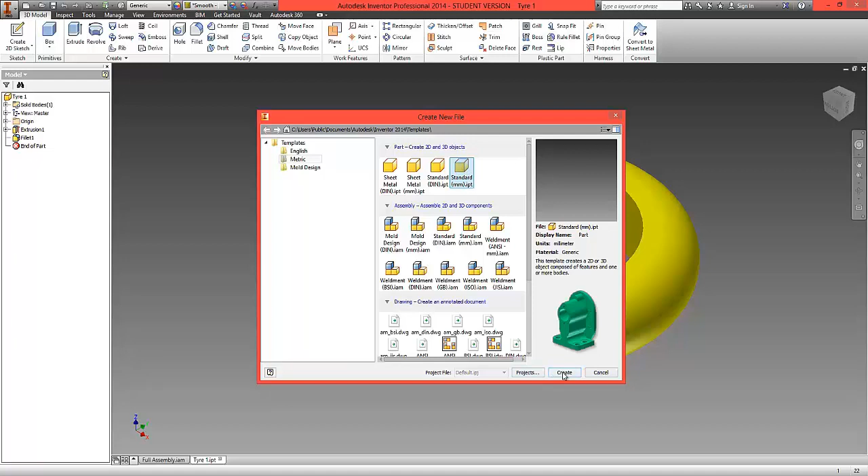First of all, in the top left corner of Inventor, choose the application button, choose New, and under the Metric tab select Standard Millimetre IPT part and select Create. We are now modelling a new part.

From the top ribbon we're going to choose Create 2D Sketch, which has a shortcut of the letter S from the keyboard, and in the appearing datum planes we're going to choose the XZ datum plane. Select it and we move into a very quick 2D view. From the top ribbon we now have a range of 2D drawing tools.

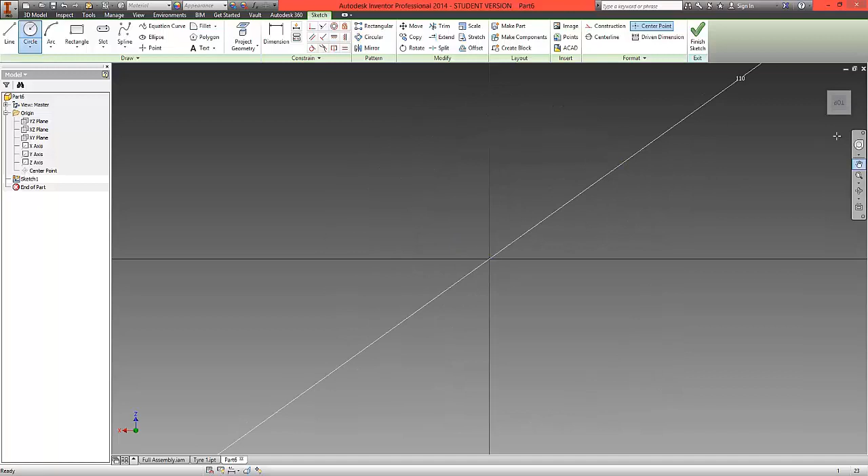We're going to select the circle tool and we're going to snap to the central dot. This will appear as a green dot. We're going to click out and enter a value of 110mm and hit enter on the keyboard. When we resize with the navigation box in the top right, we can now see we have the outside circle of the wheel.

We're going to use the same circle tool again, click to the center, this time dragging out and entering a dimension of 70mm, and again hitting enter on the keyboard. We now have two concentric circles lined up to the central point, and they're in blue because they're both constrained and dimensioned and ready to work with.

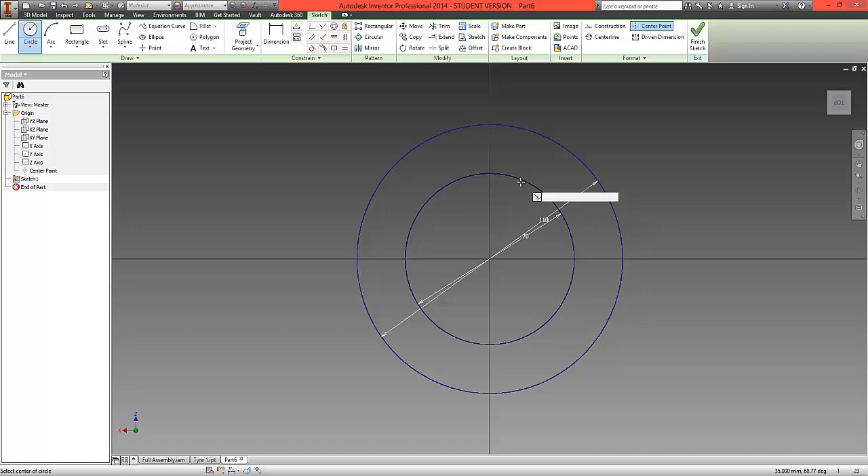Right click and choose Finish 2D Sketch. Using the navigation box we're going to resize, and we now have this donut shape. What we're now going to do is extrude this shape. We choose from the ribbon above either extrude, or we click the letter E on the keyboard, and we're going to choose to select the profile from the pop-up box.

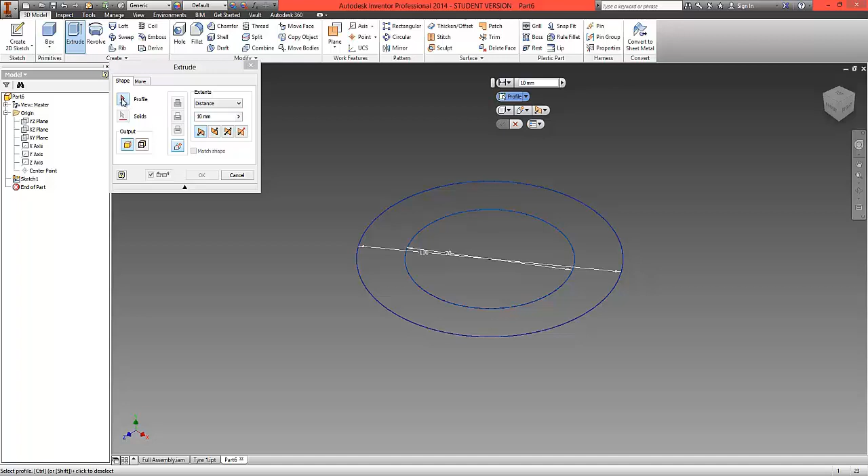We're going to choose the external ring, which is now shaded in grey, and we're going to extrude this 24mm by entering this into the pop-up box and selecting OK. We now have extruded a solid donut shape. We're now going to apply a fillet to the edges to create a round, so we can do this from the fillet tool in the ribbon or using the shortcut key F from the keyboard.

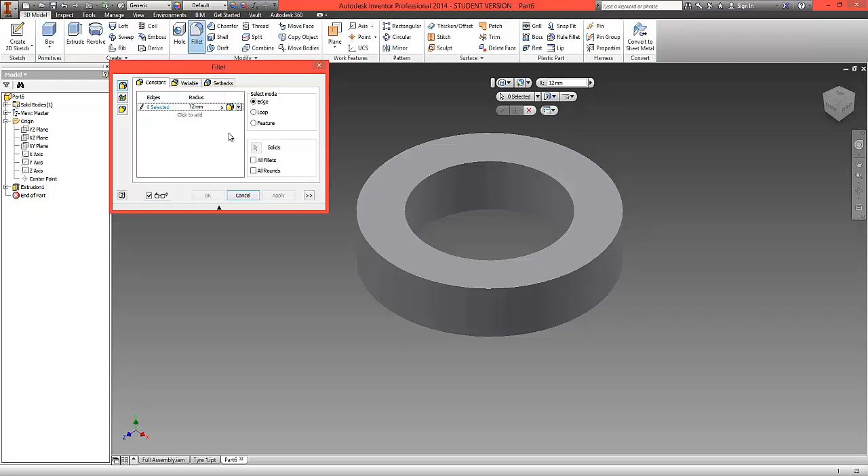We're going to enter a radius of 12mm, and then clicking into the model we're going to click the top edge and the bottom edge, and we can now see a preview of the fillet that we've applied. We're happy with this, so we click OK, and we've now finished the wheel.

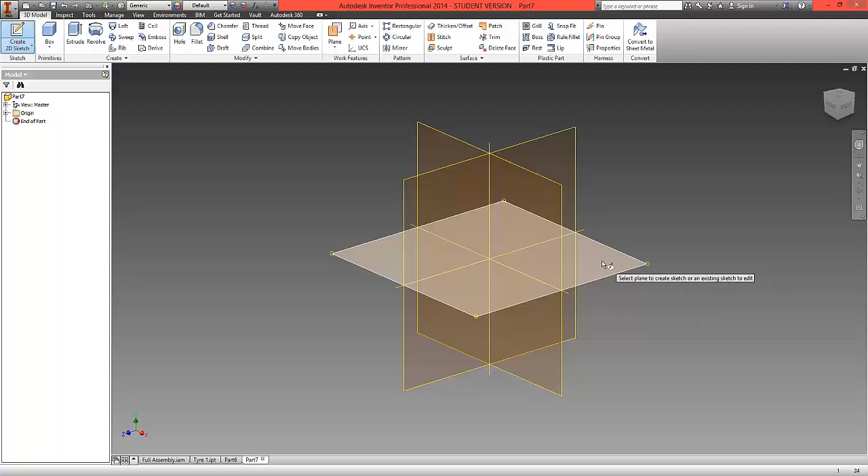The second approach is slightly different. In this approach, create a new file, Standard Millimetre IPT part, and again create a 2D sketch using the Create 2D Sketch button from the ribbon. Again select the XZ datum plane, and this time we're going to choose the rectangle tool from the ribbon instead.

This time, from the central dot, moving to the right, we're going to draw a rectangle. This rectangle will be spun around a central axis here and will give us our solid donut shape. Right click and click OK just to lose the rectangle tool. The rectangle itself is now green.

In the previous attempt we had blue line work which showed that it was both dimensioned and constrained. This is neither dimensioned nor constrained, so we need to do these things now. First of all we're going to constrain. In the ribbon above we're going to choose from the constraints the option to apply a horizontal constraint.

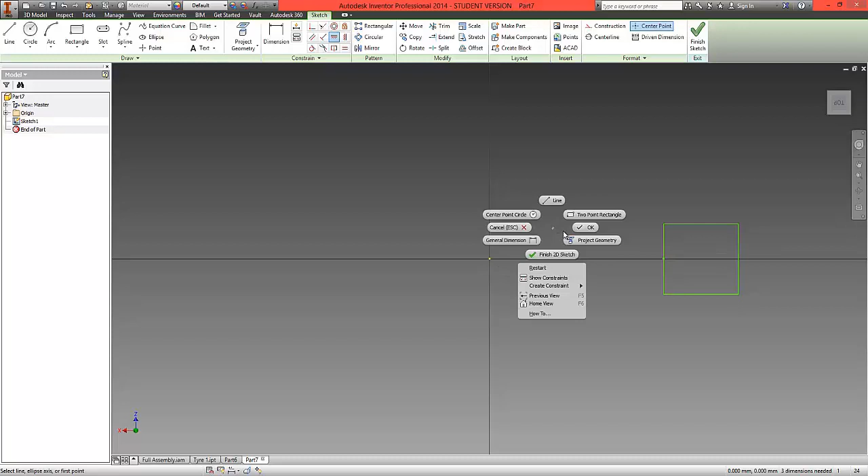The middle of this line of the rectangle, if we click, is going to line up horizontally to this central point here, which has now been applied. What this means is that if we change this rectangle dimension, it will always lie centrally along this line.

We're now going to use the dimension tool from the ribbon, and we're going to dimension this internal edge. So we're going to click once, drag out, click a second time, and we're going to enter a dimension of 24mm and hit enter. Using the navigation box, just resize to see what we're looking at.

We're now going to set the distance of this central internal line to the middle. So click once, drag to the left, click the central point, and then drag down. We're going to enter a measurement of 35mm. This will give us a total diameter of 70mm.

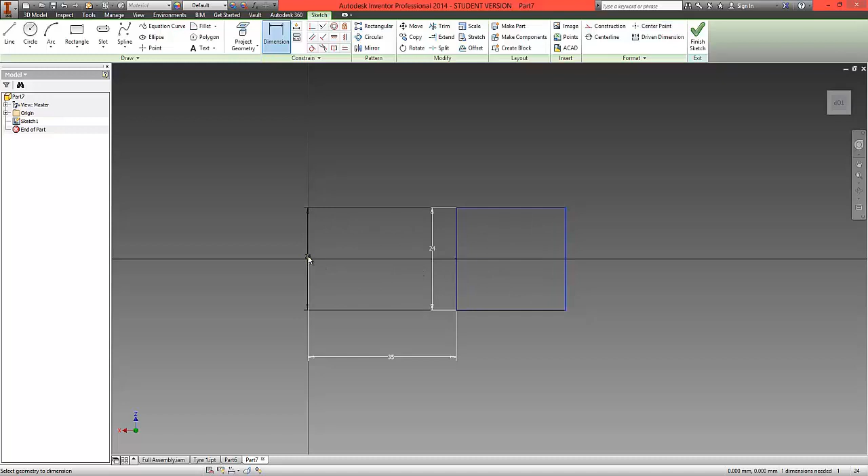We're then going to click the external edge, drag to the left, click the central point, and drag down, and this time enter a measurement of 55mm and hit enter. This will give us an external measurement of 110mm, and this internal height will be 20mm. Right click and choose Finish 2D Sketch.

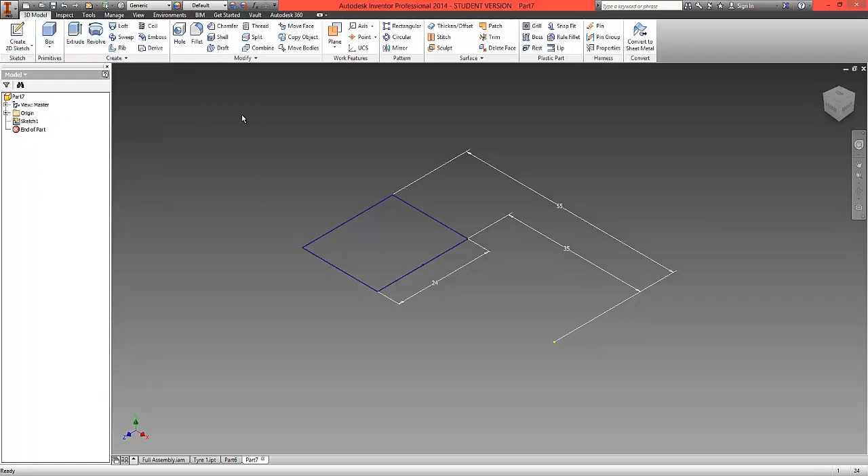Our task is now to spin this rectangle around a central axis. To do this, we're going to choose Revolve, or choose the shortcut R from the keyboard. The profile has already picked up and is highlighted in blue. So what we need to do now is find the axes.

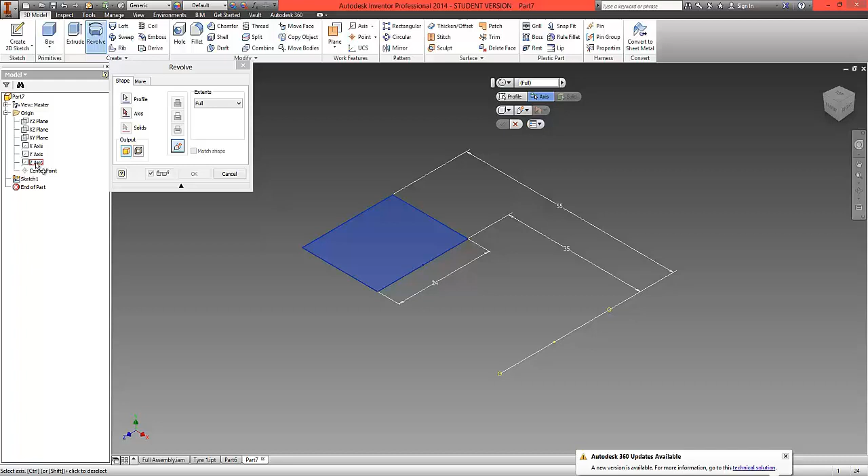If we choose the Axis tool from the pop-up and look under the Origin tab on the left hand side, we can see an X, a Y and a Z axis. In this instance, the Z axis will give me something useful to rotate my drawing around. So we're going to click the Z axis, and as you can see in the preview, it now rotates around and gives me my donut shape.

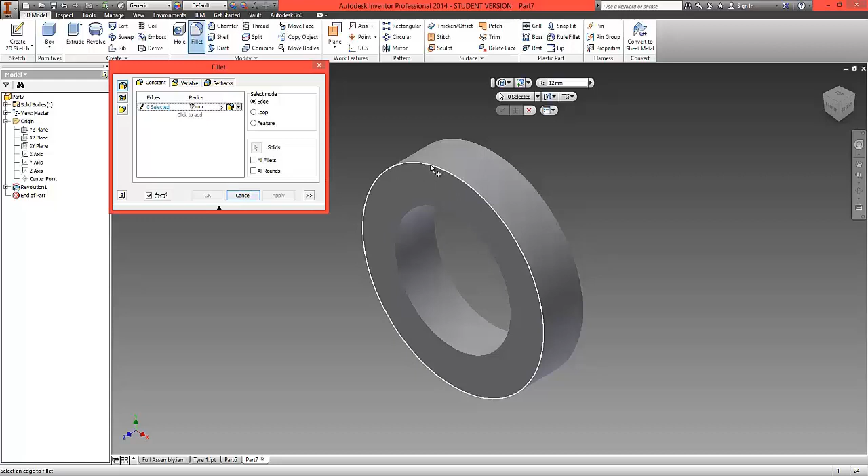Click OK. We're then going to apply the fillet with the shortcut F, enter in a radius of 12mm again, and again choose the top edge and the bottom edge, and as you can see from the preview, we have filleted the final shape. So two modelling approaches, both very different, but both with the same outcome.